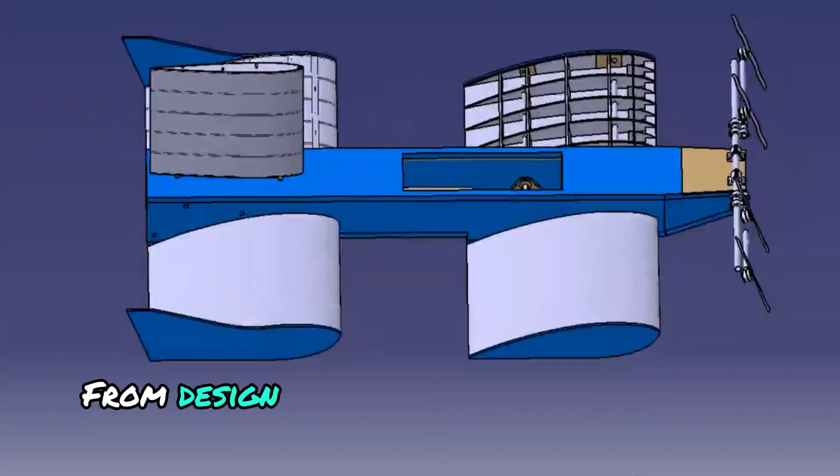Hugging the remote control and flying the plane, what does it feel like? This is the ground effect vehicle we designed and built. You heard that right, it can carry me to fly over the water. From design and production to successful test flights, we spent more than 3 months on this project.

But the story actually starts 4 years ago. On the banks of the Ganjiang River, I tested my first low-altitude flying vehicle that I had designed and built. At first, it didn't meet expectations, but after a week of optimization and upgrades, the second version almost achieved ground effect flight. This is also my first viral video, which many of you started following me for back then.

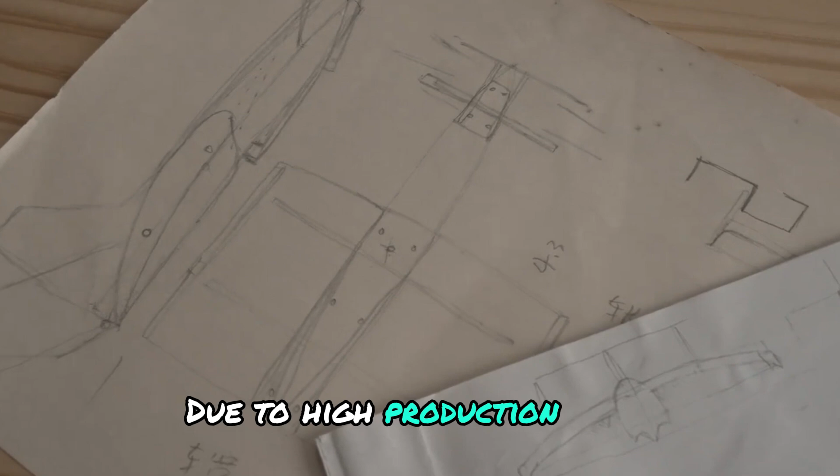Since then, I've always had the idea of creating a ground effect vehicle. However, due to high production costs, it remained just a concept on paper, buried at the bottom of a box, until 4 years later when, with the support of Insta360, the idea became a reality.

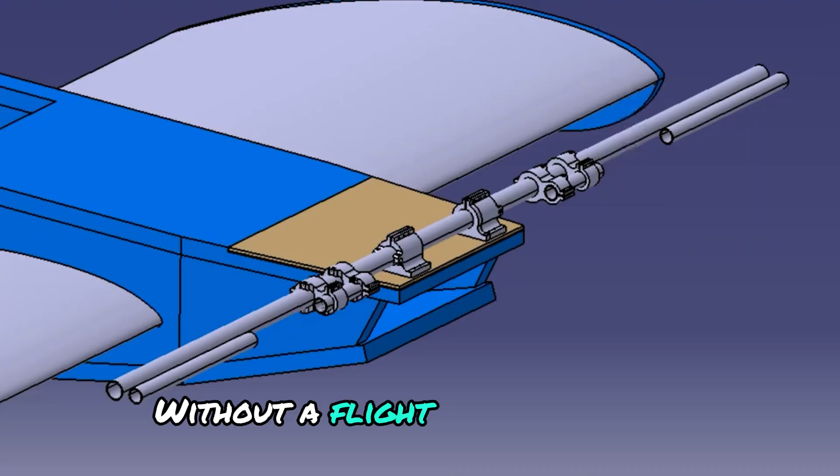This new design is quite different from the original one. It features a front and rear wing configuration. Initially, I considered paying tribute to the Soviet-era Caspian Sea Monster, but based on my previous test results, I realized that this aerodynamic shape would struggle to maintain altitude and stability without a flight control system. So, I abandoned that idea.

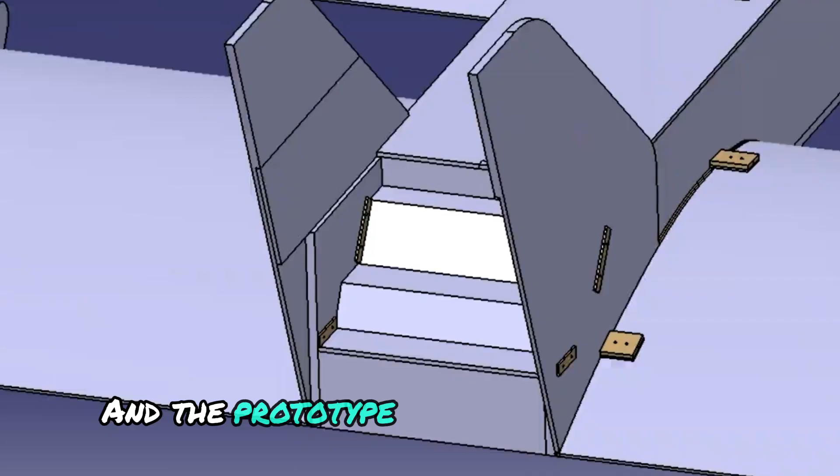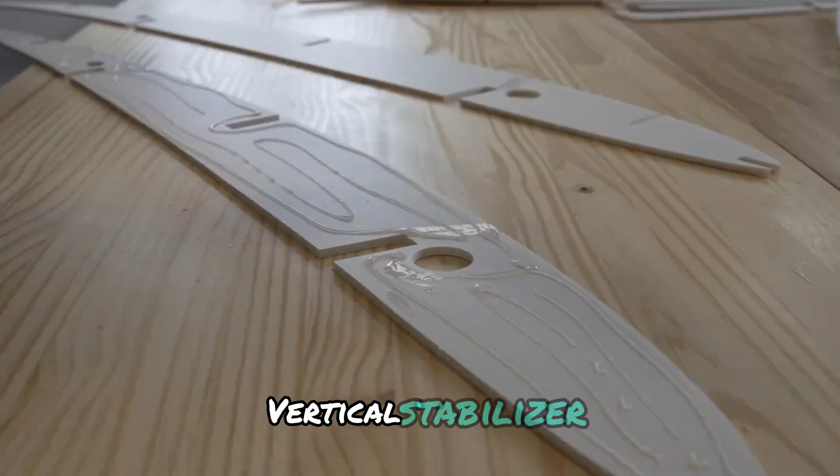The initial design had a boarding ladder at the rear with 2 small vertical stabilizers serving as handrails, giving it a yacht-like feel. In the Wolf Warrior version, I removed the ladder and replaced it with a single vertical stabilizer. This is the final design for our Wolf Warrior DMA flying vehicle.

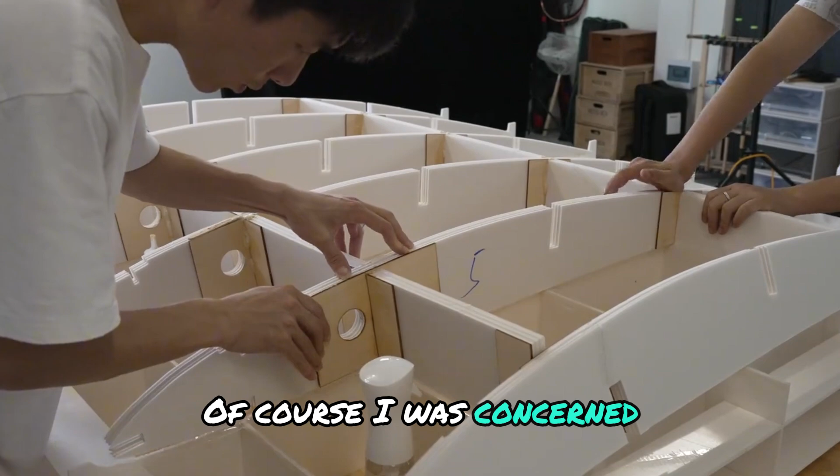The wings and main body are made of KT foam board, with multiple layers glued together for strength. I know some of you may wonder, aren't you worried the wings will break? Of course I was concerned. So, I specially ordered 8 thick carbon fiber tubes to support the structure. After testing the strength, I found it to be more than sufficient. The connection points were further reinforced with aviation-grade plywood.

To ensure assembly precision, we used a brick frame for the first time, and all the assembly work was done on this frame. Once the first wing was completed, I discovered a problem. The leading edge skin would sag. Although this didn't affect its function, it didn't look good. I redesigned it, adding extra support, and the final result was perfect.

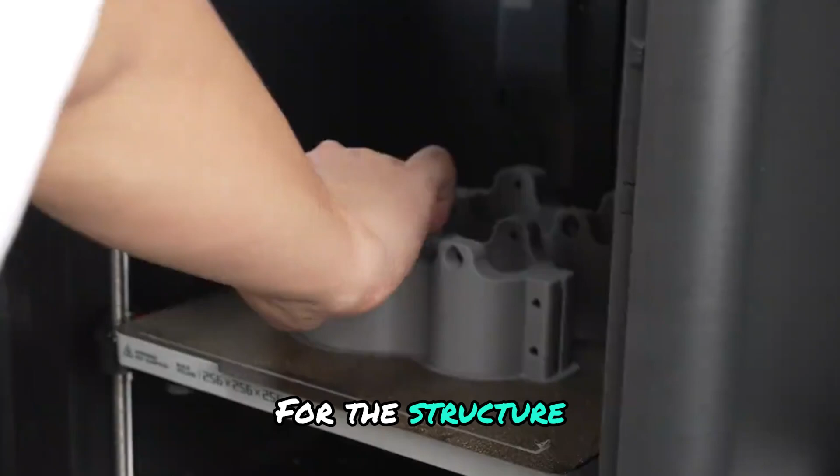The main body is made of 5 cm thick strong thermal insulation board with a hollow core, combined with fiberglass composite materials. The power system is critical for takeoff, requiring a 3-meter-long fixed link. A lightweight aircraft wing spar is a perfect fit for the structure. We used 3D printed parts to connect the motor and aluminum tube, which were reinforced and tested for strength.

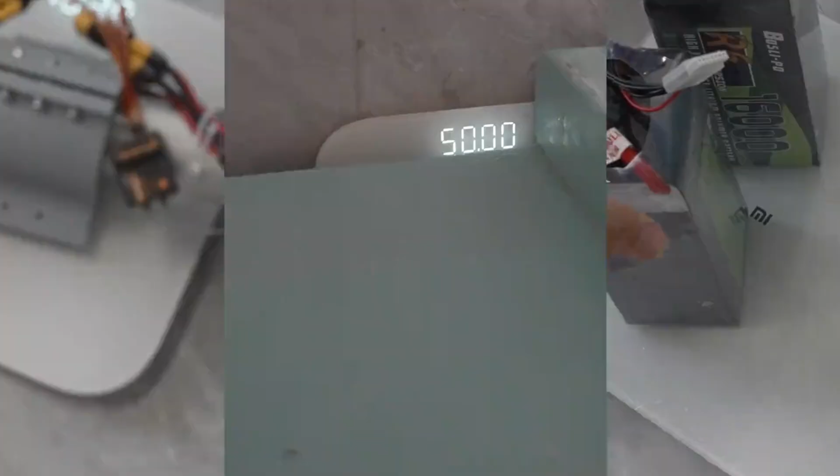The finished product looks especially cool. Its size is quite large with a 4.8-meter wingspan. It can carry up to 64 kilograms. From the first wings production, the 4 of us in the workshop worked for over a month. This was the largest project we had ever undertaken in terms of scale and engineering.

All production was completed in a room on the 4th floor. Getting it out the door was a big challenge. The wings barely fit through, and the body had to be disassembled and carried down the stairs. Luckily, the body is made of foam board, so its weight wasn't too extreme.

Next came the thrilling test flights. Local aviation enthusiasts knew I was planning to fly again and showed up to watch. Earlier tests with small-scale models had failed, so we were especially cautious during this test. We started with several hours of ground testing before attempting full flight. After everything was ready, we were able to take off. Watch as the test flight unfolds.

The ground-effect vehicle uses a 50V 16000 mAh battery, which only allows for 10 minutes of flight, with charging taking about an hour. We tested for 2 days in the sun, collecting a lot of key data. The ground cruise speed is about 48 km per hour, and it can reach a maximum of 53 km per hour. The throttle was mostly at 60%, and there was still a lot of excess power.

The flight range with one battery is about 3 km, which is a bit short. We also tried using excess energy to fly, but it couldn't fully leave the water. This may be the first manned ground effect vehicle in China. I finally fulfilled my dream of flying a plane while holding the remote. But this is just the beginning.

I will continue to optimize the design, replacing the electric motors with a gasoline engine to extend the range to 10 kilometers. I also plan to improve the flight control system, adding control surfaces to increase flight stability and safety.

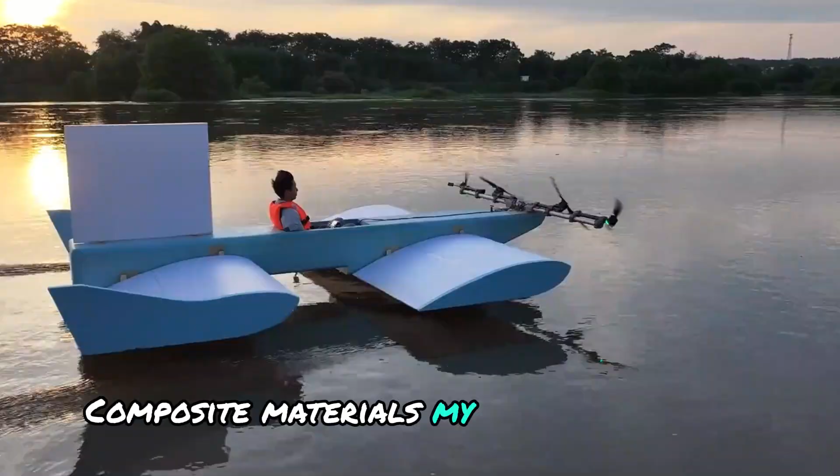Currently, this vehicle is built with the most basic materials such as foam board and cheap components. Some parts may pose safety risks with long-term use, but I plan to upgrade it all to carbon fiber composite materials. My plan is to design and develop it into a new type of single-seat watercraft. Maybe one day such flying vehicles will become a common mode of transport.